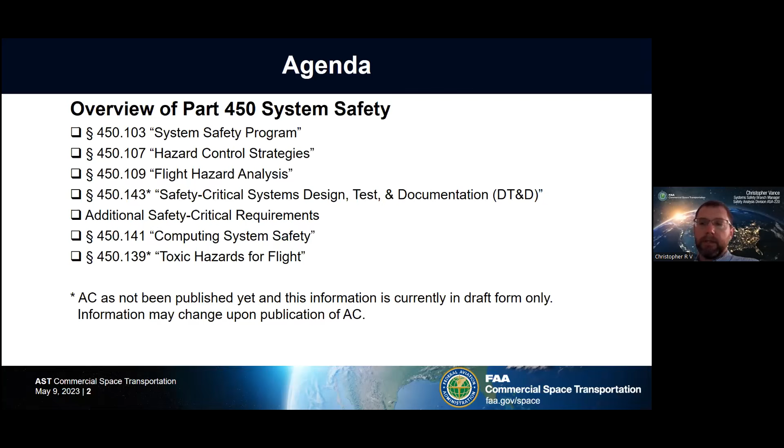So system safety at the FAA has experienced an evolution over the last 20 years. We started with a lot of our regulations in Part 415, 417, and those were system safety via prescriptive regulations. Moved into Part 431, 435, specifically for reusable launch vehicles and reentry vehicles, and Part 437 for experimental permits, which was system safety via process-based regulations.

We had a Tiger team in 2019 to assess our current practices for system safety related evaluations, and really just trying to ensure that we were completing system safety for public safety. And we rolled that into 450. 450 is system safety centric with performance-based regulations and prescribed hazard controls.

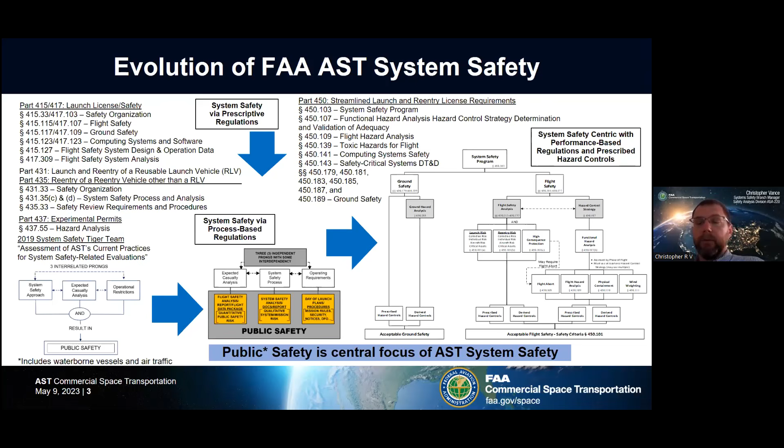And a lot of the lessons that came out of our Tiger team, we rolled into revisions to the 450 as it was being published where we could, and into the guidance that was developed. In all, though, public safety is a central focus of AST system safety, and that includes waterborne vessels and air traffic. Next slide.

All the primary advisory circulars and workshop material, if published, is going to be found on our website at the following location.

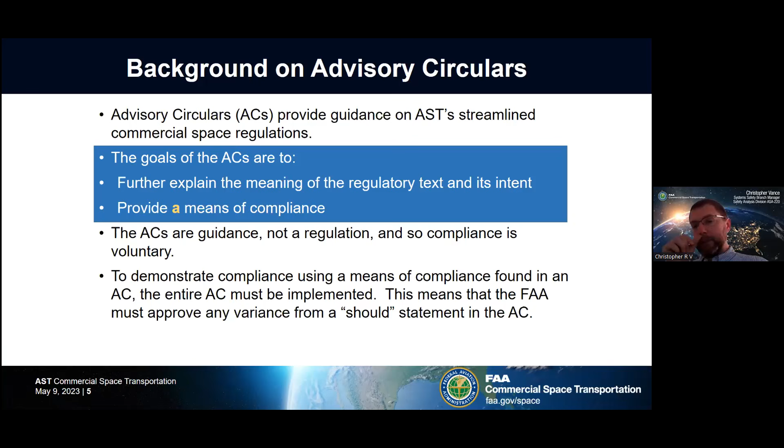A little background on ACs. ACs provide guidance on AST's streamlined commercial space regulations. The goals of the ACs are to further explain the meaning of the regulatory text and its intent and provide a means of compliance. As such, the ACs are guidance. They are not a regulation, and so compliance is voluntary. However, to demonstrate compliance using a means of compliance found in an AC, the entire AC must be implemented, and this means that the FAA must approve any variance from a should statement in the AC.

As far as all other ACs, they are found at the website and in the following locations. Comments and questions in this workshop and in all of our workshops are considered in future revisions.

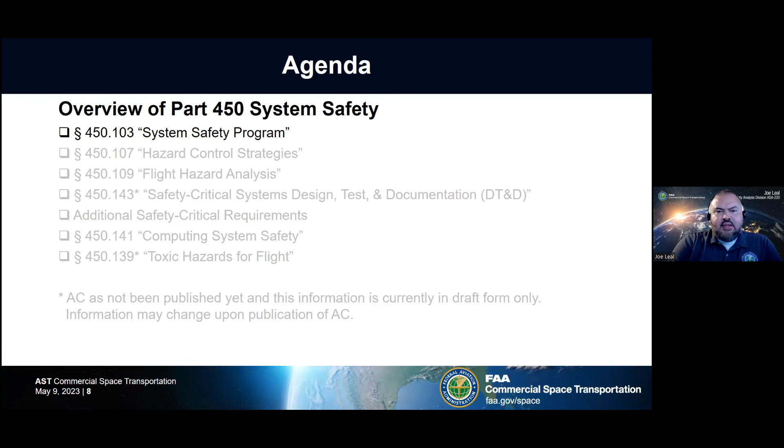But this is an iterative process. And as we launch more vehicles and look at our post-flight data, we not only refine our hazard management approach, but we learn whether our assumptions in our analysis were correct, and we iteratively update those.

So with that said, an operator must implement and document a system safety program throughout the life cycle of a launch or reentry system that includes the following: A, a safety organization; B, hazard management; C, configuration management and control; and D, post-flight data review.

An effective system safety process should be incorporated throughout the life cycle of the program, as public safety hazards associated with systems and operations of a launch or reentry vehicle are generally reliant on sound design, manufacturing, and operational processes and procedures that span the life cycle.

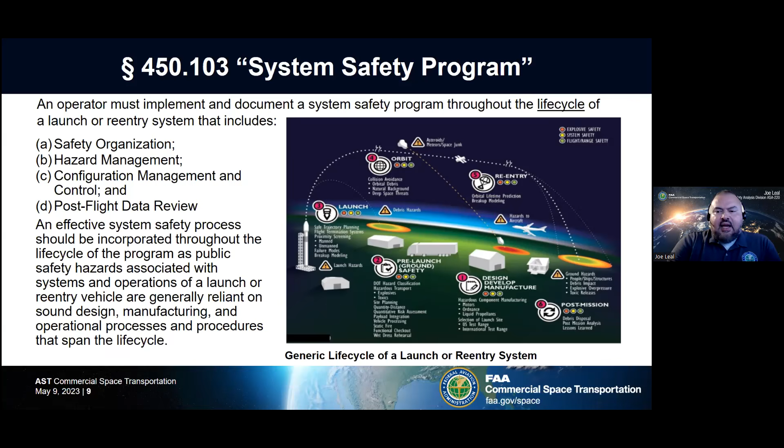So section 6.2 is called Context for a System Safety Program. And the scope of the system safety incorporates all elements of the program that contribute to achieving compliant operations. Section 450.103 specifically deals with organizational structures and management process and principles relied upon for ensuring that hazard controls and analysis correspond to actual operations.

So just a disclaimer, what you're going to find is, this AC deals with not only the organizational structure, but all of the processes that have to be in place to achieve hazard management.

The SSP documents the core processes that ensure that the fundamental risk requirements of 450.101 and the system safety risk criteria of 450.109(b)(3) and 450.185(c) are met over the life cycle of the system.

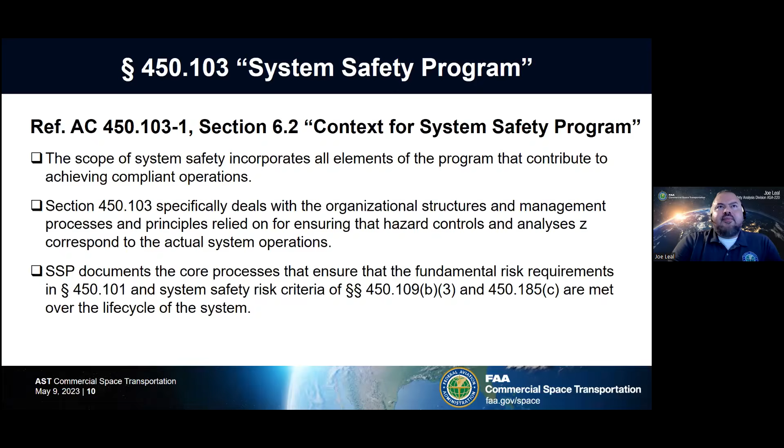As you can see, there's a couple of other outputs, which we'll talk about in a minute, but you can see that it is an iterative process. So it feeds back into the hazard management system after each mission.

So to begin with, on the left-hand side, hazard management is the assessment of the system and communication of this assessment to personnel implementing the remainder of the safety requirements. So when we talk about assessing the system, what we're doing is we're looking at our hazard control strategy and all of our analysis, and we're making sure that it actually relates to actual operations. So hazard management, you can see that assessment and communication are key.

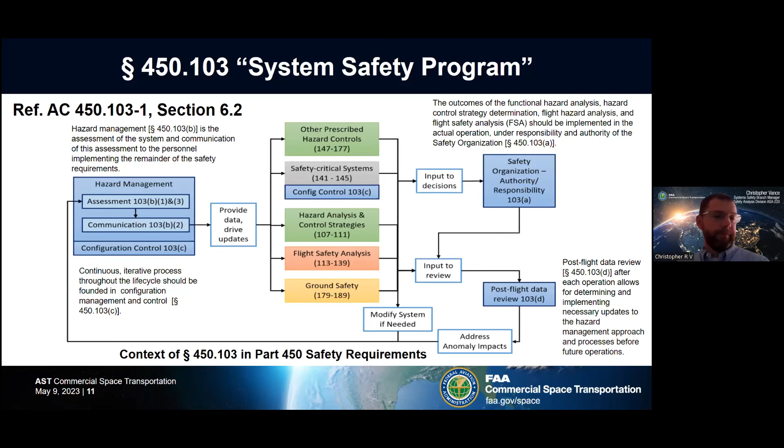Okay, so paragraph A deals with the safety organization. An operator must maintain a safety organization that has clearly defined lines of communication and approval authority for all public safety decisions. At a minimum, the safety organization must have the following positions: the mission director and the safety official. For each launch or re-entry, an operator must designate a position responsible for the safe conduct of all licensed activities and authorized to provide final approval to proceed with licensed activities. This position is referred to as the mission director in this part.

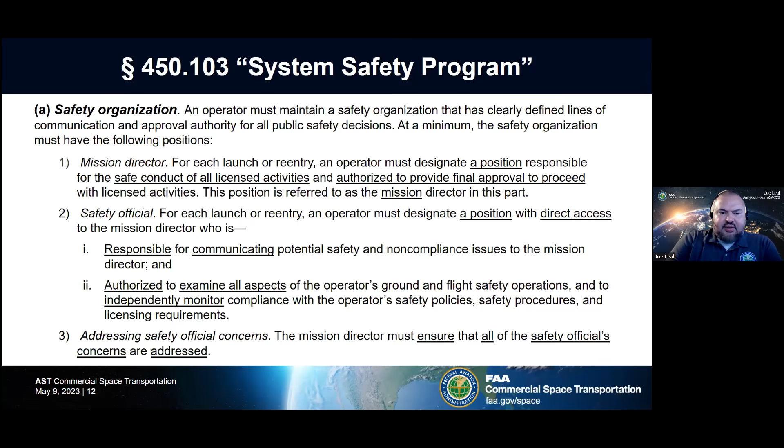Now, the safety official: for each launch or reentry, an operator must designate a position with direct access to the mission director, who is responsible for communicating potential safety and non-compliance issues to the mission director, and is authorized to examine all aspects of the operator's ground and flight safety operations, and to independently monitor compliance with the operator's safety policies, safety procedures, and licensing requirements. All of the safety official's concerns must be addressed by the mission director. So the key item there is that the mission director must ensure that all of the safety official's concerns are addressed.

So Section 7 of the AC is called Safety Organization. The establishment of a safety organization is a critical component of a launch and mission operation and public safety, whose primary responsibility is to carry out processes needed to protect public safety, as well as identified in the system safety program.

Now, 401.7 deals with mishaps, and it has 9 definitions of what constitutes a mishap, and failure of a safety organization is one of those that are covered.

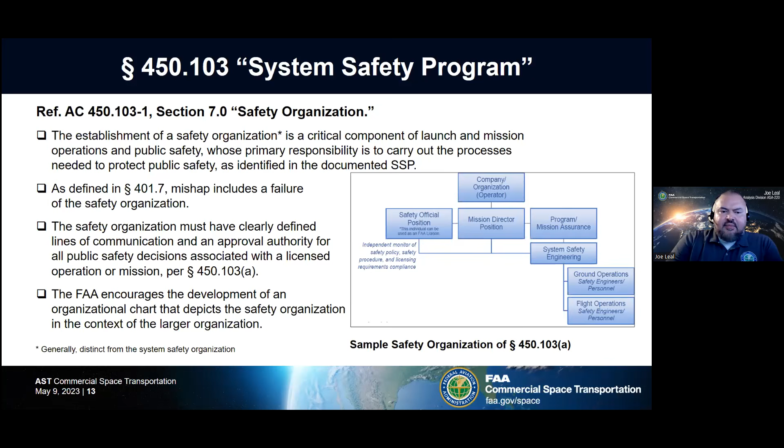The safety organization must have clearly defined lines of communication and approval authority for all public safety decisions associated with a licensed operation or mission per 450.103A. Again, we encourage the development of organizational charts like this that depict the safety organization in context of the larger organization.

So here we're going to discuss paragraph B, hazard management. For hazard management, an operator must implement methods to assess the system to ensure the validity of hazard control strategy determination, and any flight hazard or flight safety analysis throughout the life cycle of the launch or reentry system. We saw that figure earlier that was iterative, and that's really the key thing. We have a hazard control strategy, determination, and we have analysis that we need to look at to make sure that our assumptions were correct.

And that tool is called our functional hazard analysis, which we'll cover in lesson 450-107. So section 8.1.1 is called our functional hazard analysis. This must be performed for all Part 450 license applications in accordance with 450-107B. This is what provides for a methodical determination as well as continual validation of the hazard control strategy, the flight safety analysis, and the flight hazard analysis for each phase of flight during a launch or reentry operation.

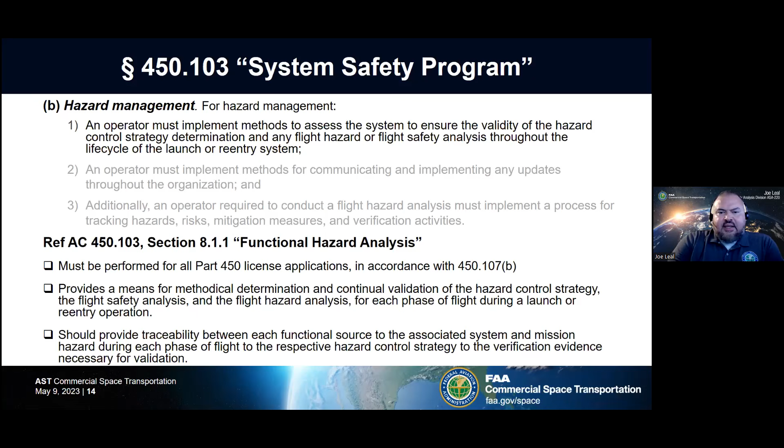So here we have section 8.1.2 called reasonably foreseeable. Anytime you see that phrase, what this means is that it's readily discernible via analysis. Just interchange reasonably foreseeable with readily discerned via analysis. So reasonably foreseeable is not associated with a probability or likelihood, but it's inherent to the methodical assessment of the entire system. As mentioned earlier, the functional hazard analysis is that tool that we use, and it's required for all 450 applications.

It's expected that reasonably foreseeable hazardous events are those identifiable through the system safety process, beyond those that could be determined solely by brainstorming. As mentioned, the functional hazard analysis is that system safety analysis tool primarily used to identify, classify, and analyze system functions and consequences of functional hazards associated with the conceptualized operation or mission.

Now, the objective is to identify all pertinent potential system, subsystem, and component functional hazards that could impact public safety. It's important to note that the identification of potential system hazards and respective functional sources should not consider any foreseeable mitigations, redundancy, or predetermined hazard control strategy. So what that's saying is that when you first look at these functions and the hazards that they may introduce, we want to make sure that when we start the process, we don't take credit for any mitigations. When we get to 107, we'll talk about that in more detail.

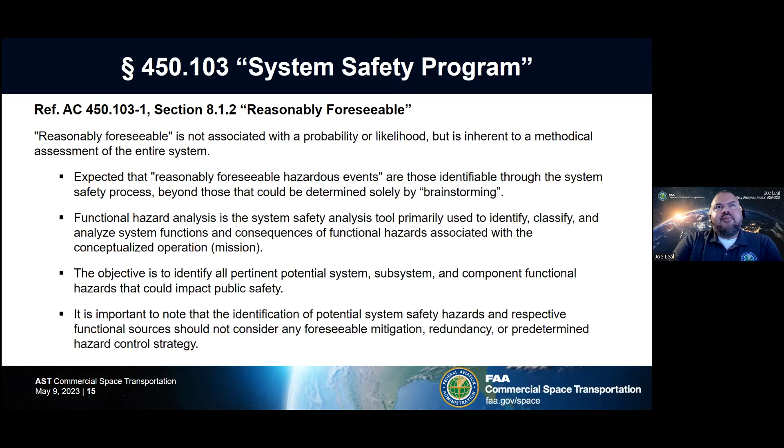So section 8.1.3, flight hazard analysis. The system safety approach of a flight hazard analysis may be determined as a hazard control strategy per 450-107A, or it could be required by 450-107 Charlie. So as mentioned, the flight hazard analysis is not only an accepted way to mitigate hazards, it's an accepted hazard control strategy, but it may also be required if none of the other hazard control strategies apply or mitigate public risk to the accepted level.

So the documented SSP should define the methodology and the process for ensuring continued validity in accordance with 450-103B1 and 450-109, and it should define a process for tracking hazards, risks, mitigation measures, and verification activities in accordance with 450-103B3. And we actually have an advisory circular for the flight hazard analysis, AC 450-109-1, which we'll cover in the lesson for the flight hazard analysis.

Now, in terms of the AC, section 8.1.4 is called flight safety analysis. So a flight safety analysis must be performed and documented in accordance with 450-113 through 450-139. Some of the items covered are things like the methodology, 450-115. There's also trajectory analysis, 117 and 119, as well as debris analysis covered in 121. So there's several sections there that cover compliance for the flight safety analysis. And the documented SSP should ensure the validity of analysis and appropriate methodology in place to achieve these requirements.

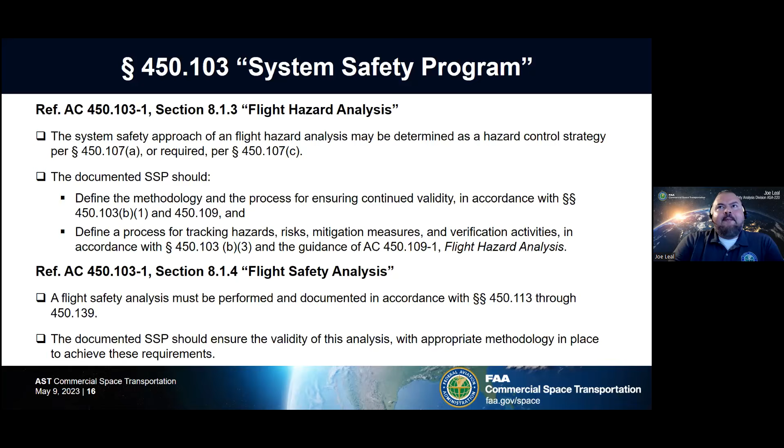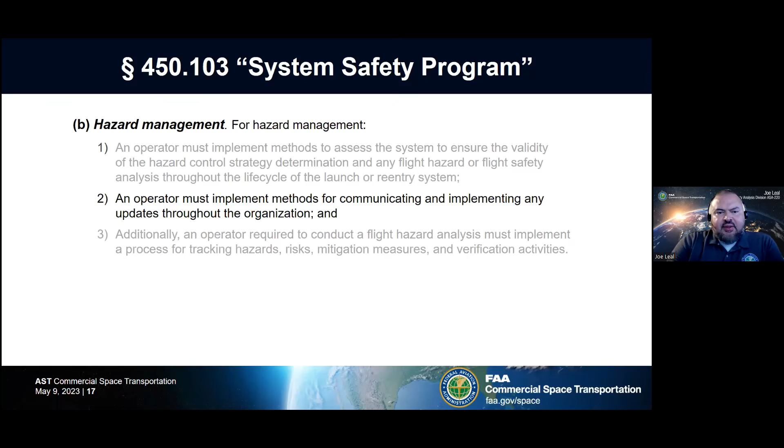So hazard management. For hazard management, an operator must implement methods for communicating and implementing any updates throughout the organization.

So section 8.2 in the AC is called managing updates. In accordance with 450-103B2, the System Safety Organization ensures communication and implementation of any updates throughout the organization. The documented SSP should define tools and processes defined by the System Safety Organization to ensure that safety analysis data is effectively communicated, required actions and necessary updates are efficiently implemented, and the safety information is thoroughly organized and maintained.

Now, for the system safety organization, the documented system safety program should at a minimum detail established lines of communication to management and engineering for informing of impacts to risk and to the public and necessary implementation actions to address impacts. So in essence, we want you to describe in enough detail all of the interfaces between the safety organization and external groups, which we'll talk about in the next few slides.

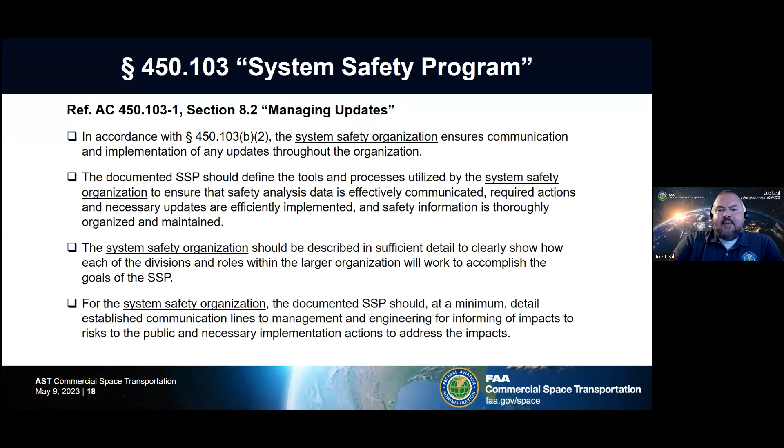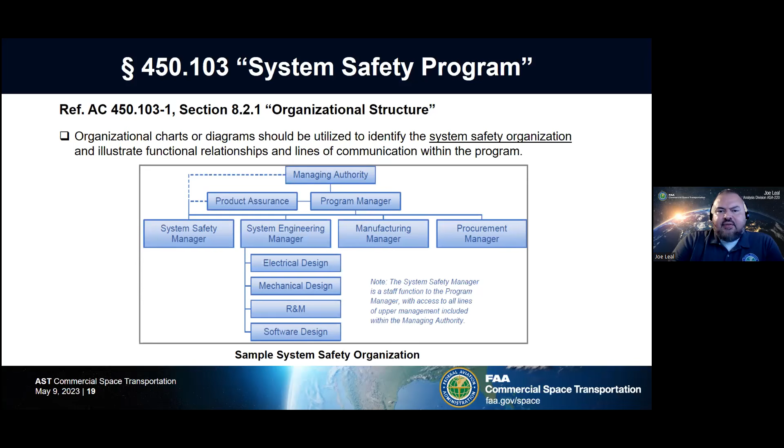So section 821 is called organizational structure, and this is just an example system safety organization. You can see that on the third tier, we have our system safety manager and different groups shown within this org chart. These types of diagrams should be used to identify the system safety organization and also illustrate functional relationships as well as lines of communication within the program. So we encourage the use of these types of charts.

So as mentioned, we have 822, which is the integration chapter. The documented system safety program should provide clarity about how the different parts of the organization interface with the system safety organization and each other.

And it should do the following: it should define the interfaces with functional organizations and other disciplines, to include things like program management, systems engineering, design engineering, and so forth. It should also define interfaces with other applicable safety disciplines, such as software safety, range safety, nuclear safety, and so forth. And then the last bullet, it should define procedures for integrating and coordinating the system safety effort, including definition of system safety requirements within design specifications and operations documents, dissemination of system safety requirements to relevant organizations and contractors, support to program and design reviews, trade studies, and so forth.

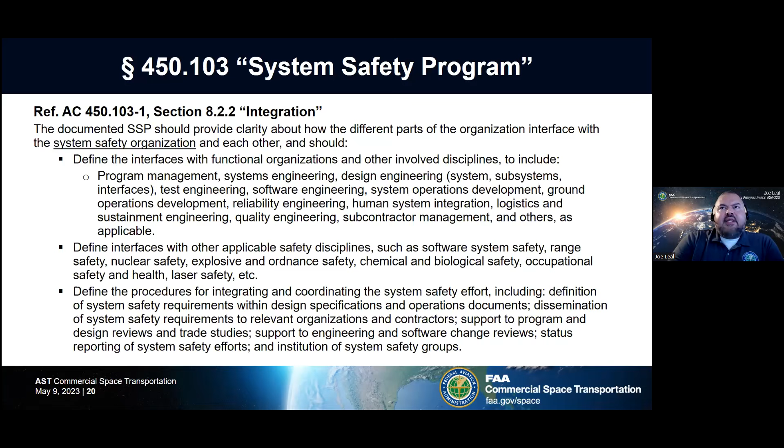Section 8.2.2, integration continued. It should also define expected criteria for interaction with configuration management processes, software development processes, data management processes, and system and design engineering processes. The interfaces and criteria should include requirements, data exchange, and communications. It should also describe tools used to convey safety information, such as a hazard tracking system or an internal workflow system, since we could have different databases and workflows to accomplish the integration and exchange of information.

Section 8.2.3 is called oversight in the AC, and an effective plan also includes oversight and tracking. The documented SSP should define the management of contractors' and subcontractors' system safety efforts that have been procured, including integration of their system safety analysis and data. It should also identify when formal approval of safety documentation is required, by whom, and how that approval is documented, and it should define processes by which management decisions are made, including timely notification of unacceptable risk, necessary actions, mishaps, anomalies, waivers to system safety requirements, and program deviations.

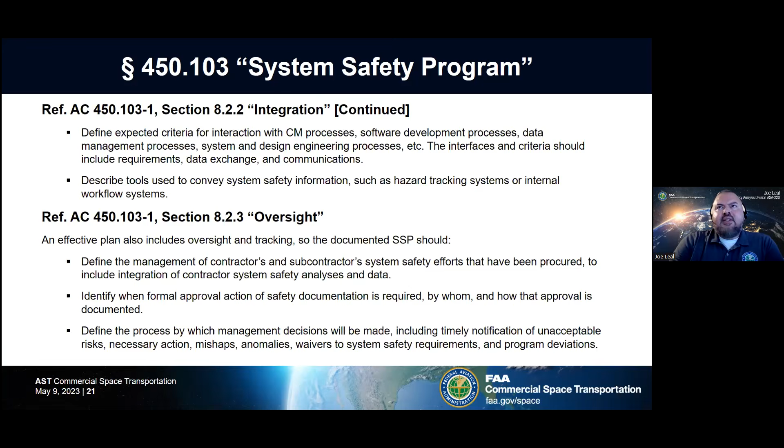Hazard management, the third item there. Additionally, an operator required to conduct a flight hazard analysis must implement a process for tracking risks, hazards, mitigation measures, and verification activities. So we talked about the criteria for when a flight hazard analysis is required, and tracking is critical.

Section 8.3 of the AC is called tracking of flight hazard analysis data. Data tracking is essential for sound and continual valid flight hazard analysis. The documented SSP should define a process and mechanism for identifying, detailing, tracking, collecting, analyzing, and retaining flight hazard analysis data. Some examples of mechanisms are hazard reports, hazard databases, and systems engineering management tools, etc.

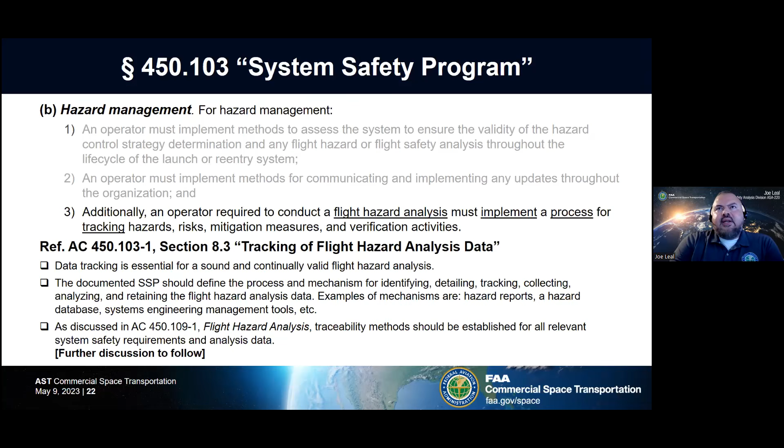As discussed in the advisory circular AC 450.109-1, flight hazard analysis, traceability methods should be established for all relevant system safety requirements and analysis data. When we get to our lesson on flight hazard analysis, we'll cover this more in detail. Next slide, please.

We talked about configuration management back in Figure 1, and it was the foundation of hazard management. Paragraph C states that for configuration management and control, an operator must employ a process that tracks configurations of all safety critical systems and documentation related to the operation. It must also ensure the use of correct and appropriate versions of systems and documentation are tracked per paragraph C1 of this section, and it should document the configurations and versions identified in paragraph C2 of this section. Next slide, please.

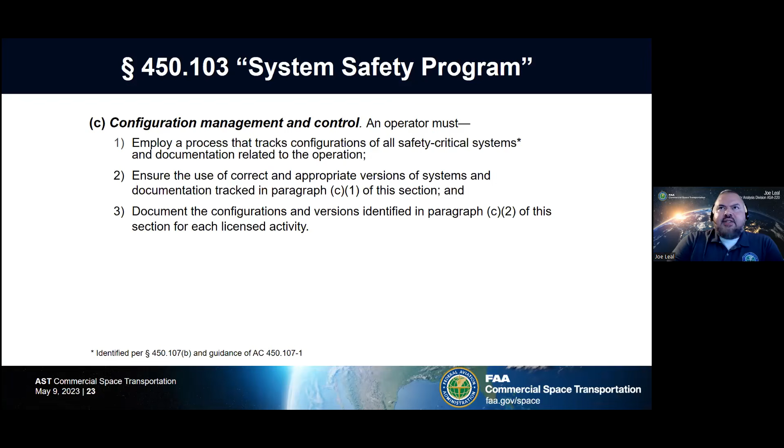Section 9, configuration management and control. The documented SSP should define the configuration management and control process specific for all safety critical systems and documentation. Standards for configuration management and control can be found in Military Handbook 61. The first version of this was released in September 1997, and the current version is version B, which came out in April 2020.

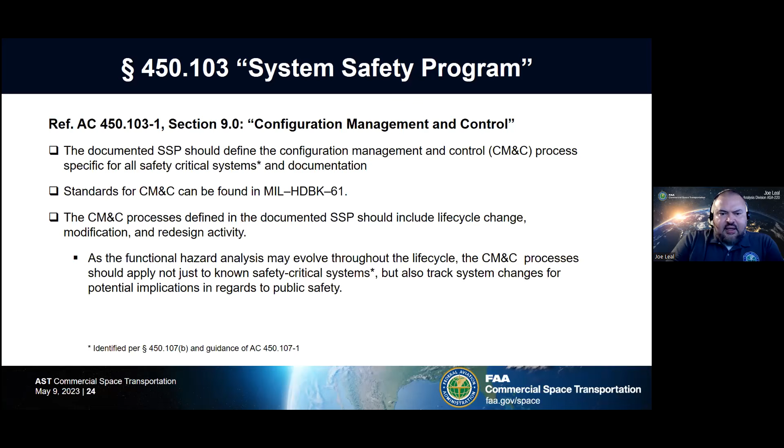You can reference this as one of the means of compliance for configuration management and control. This configuration and management control process has to be defined in the SSP, and it should include lifecycle change modifications and redesign activity. Remember that as the functional hazard analysis evolves throughout the life cycle, this process should apply not just for known safety critical systems, but also track changes for potential implications regarding public safety. Next slide, please.

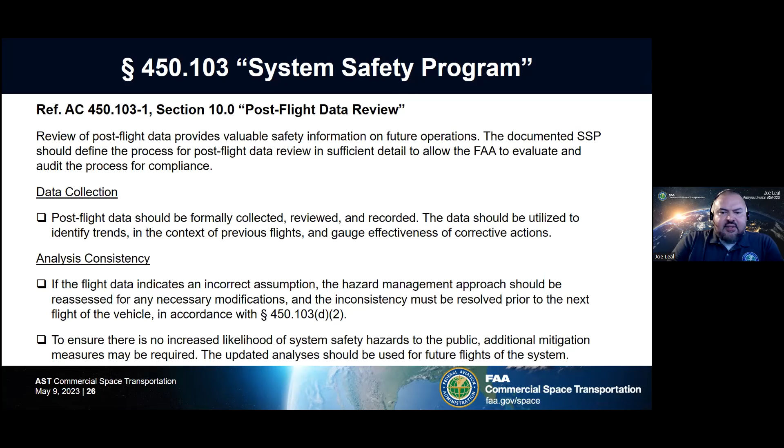As far as analysis consistency, if the flight data indicates incorrect assumptions or that the hazard management approach should be reassessed for necessary modifications, the inconsistencies must be resolved prior to the next flight of the vehicle in accordance with 450.103 D2. This is also to ensure there is no increased likelihood of system safety hazards to the public. Additional mitigation measures may be required, and the updated analysis should be used for future flights of the system. Next slide, please.

So, post-flight data review. With that, we have to identify any anomalies that may impact any flight hazard analysis, flight safety analysis, or the safety critical system, or is otherwise material to public safety, and must address any anomaly identified in paragraph D3 of this section prior to the next flight as necessary to ensure public safety, including updates to the flight hazard analysis, flight safety analysis, or the safety critical system.

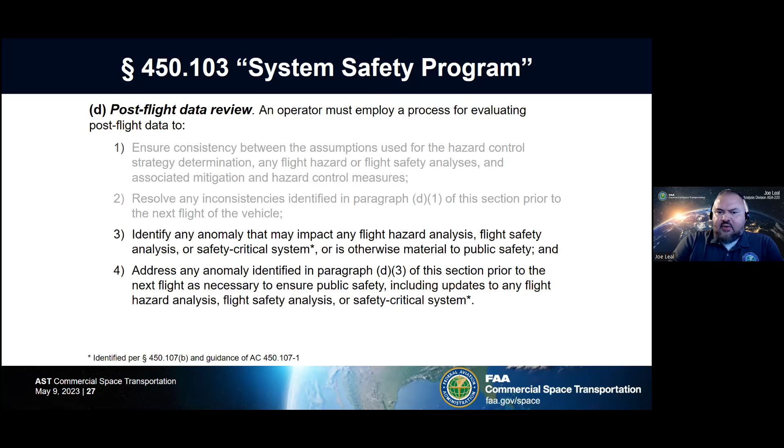There's an asterisk there, but we won't talk too much about safety critical systems in this lesson, but those are identified through the functional hazard analysis, and we'll cover that more in 450-107.

Section 10.3 is titled Anomaly Reporting and Investigation. Anomaly reporting and investigation is essential for ensuring continually valid system assessment. The documented SSP should define system safety involvement in the anomaly reporting, investigation, and resolution. The resolution process should be outlined for updating analysis and risks to address the anomaly, including any additional required mitigations, as well as for the periodic review of these analyses and the risk, and this can occur either before flight or after.

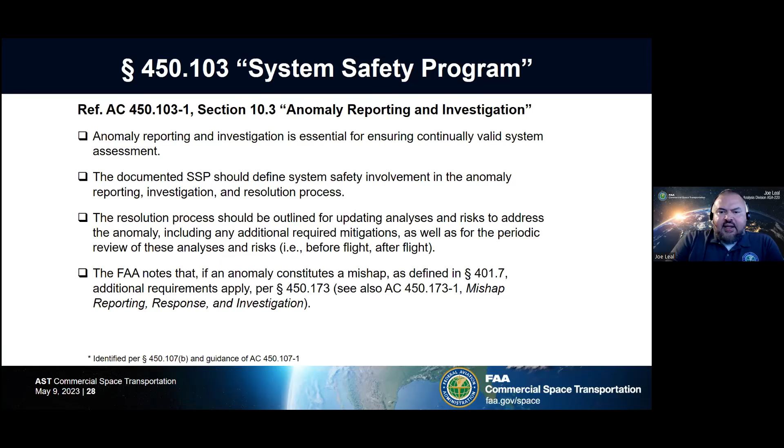The FAA notes that if an anomaly constitutes a mishap, which is defined in 401.7, additional requirements apply. 450.173 deals with mishap reporting, response and investigation, and there is an advisory circular for that.

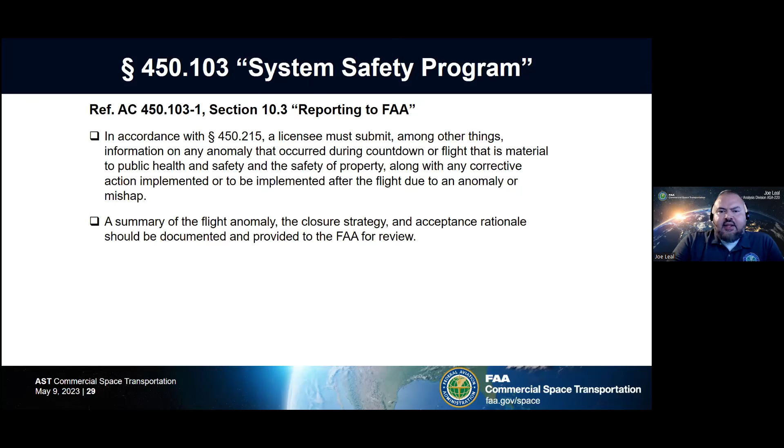Reporting to the FAA, in accordance with 450.215, a licensee must submit, among other things, information on any anomaly that occurred during the countdown or flight that is material to public health and safety and safety of property, along with corrective action implemented or to be implemented after the flight due to the anomaly or mishap. A summary of the flight anomaly, the closure strategy, and acceptance rationale should also be documented and provided to the FAA for review.

Note that submission could take form, as we mentioned earlier, either one document or a set of documents that span all of the requirements.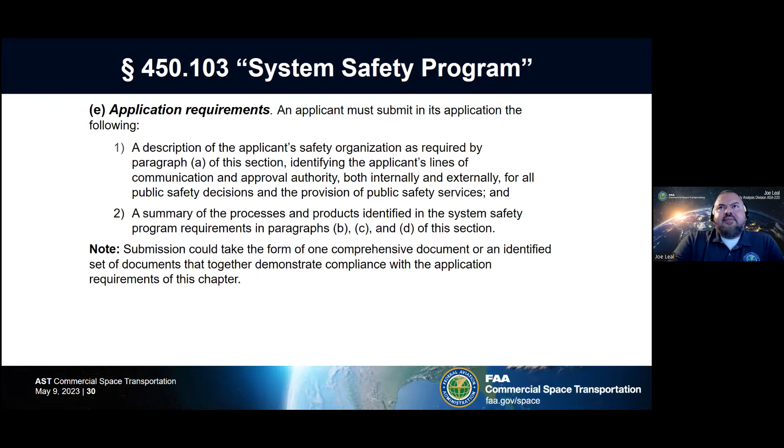Now we're going to look at the appendix. We have key aspects of a sound system safety plan. Appendix A1, system safety risk assessment. The risk assessment should be used for system safety for flight and ground safety, and it's generally qualitative, but there are instances when a quantitative demonstration may be possible or even necessary.

So for system safety for flight, it is meant to augment or add the quantitative risk calculated by the flight safety analysis and inform the development and refinement of applicable mitigations. The operator must also assess each hazard's likelihood and severity per 450.109(b)(2) and 450.185(b). So we have likelihood requirements there. We're going to look at these in the next slide.

We actually have a slide which we'll use to discuss these levels. An operator should define severity categories and likelihood levels to ensure that the system safety requirements are met. Those criteria are found again in 450-109B3 and 450-185C. These severity categories and likelihood levels may be informed by industry practice or existing government standards.

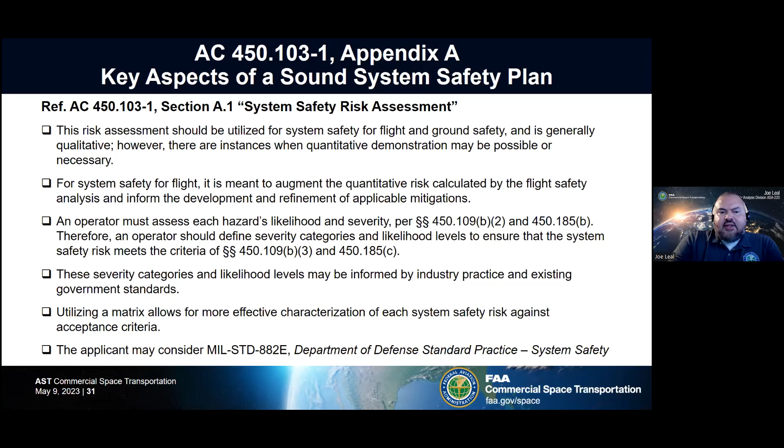So this is table 3 of the AC. What these are laying out are just two items: the severity categories on the left and the different likelihood levels that you could use on the right. We encourage you to use something that is in the MIL standard, or come up with your own severity categories that mirror what's in the advisory circular. So what you'll find is we have different categories for the severity: catastrophic, critical, marginal, or negligible.

And then for the likelihood levels during the mission, we can come up with different levels such as frequent, probable, occasional. Extremely remote, level E, is what we're interested in. So when you categorize your risk, we want to show that the likelihood is extremely remote. We'll cover this a little more when we talk about our functional hazard analysis.

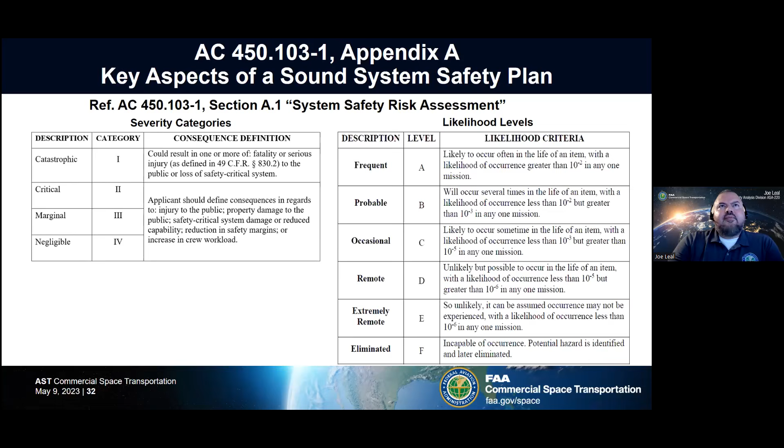Section A.2, system safety requirements. Identification and implementation of system safety requirements within system engineering processes ensure the effectiveness and validity of system assessments.

The systems engineering process should be outlined for safety design requirements, for which objectives are to mitigate system hazards through systematic application of design guidance from standards, specifications, regulations, design handbooks, safety design checklists, and other sources. Safety design requirements should be included in the system specification and expanded for inclusion in the associated lower level specifications.

Safety operational requirements should be included in procedures, tests, and inspection documentation, applicable rules or commit criteria, as well as items like operational clear areas.

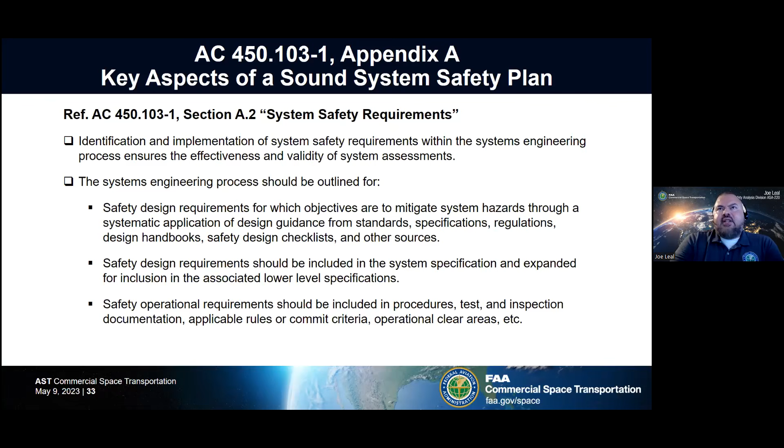Section A.3 discusses the integrated schedule. The system safety schedule ensures effectiveness of the system assessment throughout the life cycle of the program. So we want to not only track the schedule, but make sure we line up certain criteria with the schedule.

The documented system safety program should detail the system safety activities and milestones within the overall program schedule, including product or task start and completion dates, reports, reviews, and safety milestones. Typically, the milestones of the system safety program coincide with license processes, program reviews, and other contract milestones.

Thus, the schedule should detail the system engineering activities for which the system safety efforts are integrated, such as technical reviews, program reviews, design analysis, and test activities.

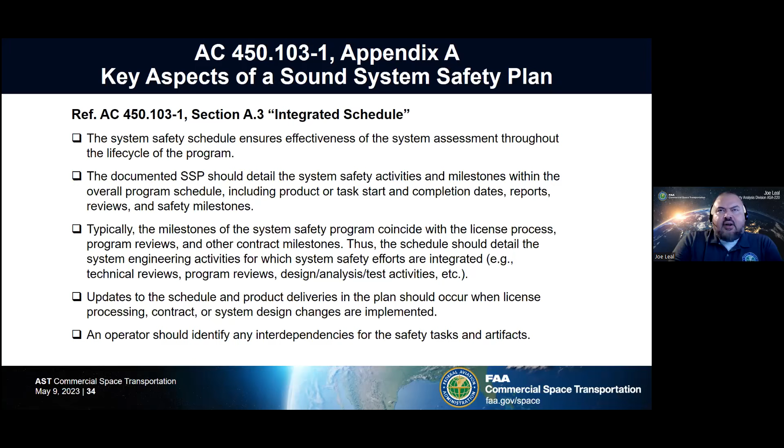Updates to the schedule and product deliveries in the plan should occur when license processing, contract, or design changes are implemented. An operator should identify any interdependencies for safety task and artifacts.

Section A31 is integration with other program activities. To be effective, the system safety activities for any program should be integrated to other program activities. To be efficient, each system safety task should be carefully scheduled to have the most positive effect.

A system safety analysis should be performed early in the design process, so it can lead to the inexpensive elimination of hazards through design changes.

As hazards are identified later in the life cycle, it becomes more expensive and difficult, not only to change the design, but also almost impractical to design out of the system. In such cases, hazards are controlled through either operations or procedures, and also training. But having to do so is going to force the operator to have long-term costs and risks associated due to identifying those hazards late in the design process.

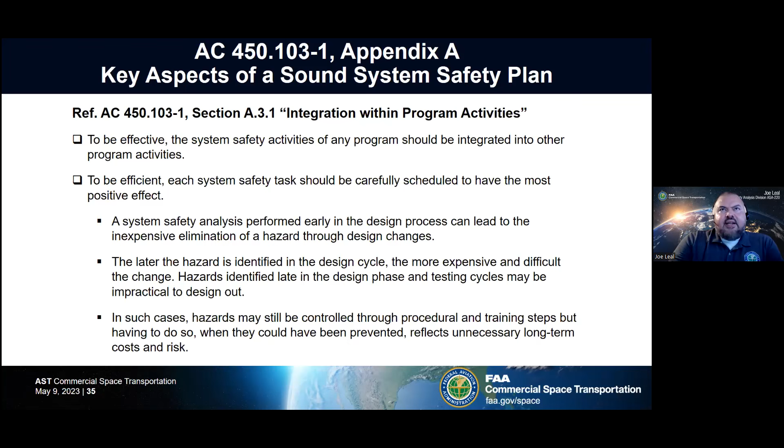Section A4, management of life cycle risk. Management of life cycle risk is essential for ensuring the continued validity of system safety analysis.

Impacts to risk include design or operational changes. These are typically managed by change impact analysis. The impact should be determined for any changes to the design configuration or operation of the safety critical system.

Safety critical systems are identified through the functional hazard analysis, which will be discussed again more in the 450-107 lesson. The current hazard management approach and hazard control strategy should be reassessed with respect to the change and updated appropriately. Impacts to risk due to reuse of systems, subsystems, or components are typically managed by a reusability approach.

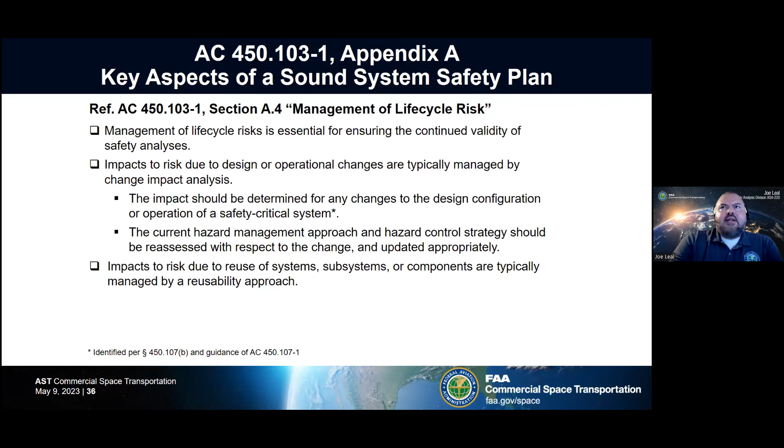Section A5, system safety data handling. Data tracking is essential for a sound and continual valid system assessment. The documented SSP should define the process for identifying, detailing, tracking, collecting, organizing, and retaining system safety data.

Examples of this data include test documentation and data, hazard reports, procedures, lessons learned, contractor deliverables, post-flight documentation, anomaly reports, and pertinent historical hazard or mishap data.

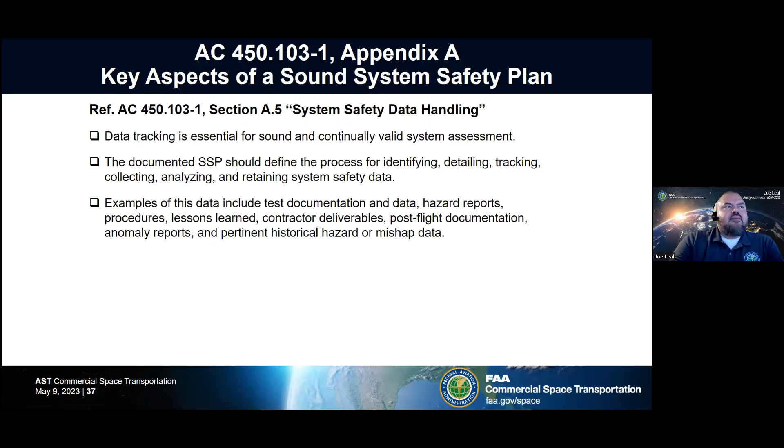Section A6, consideration of additional system safety related tasks. A complete system safety effort should consider and integrate tasks and activities usually performed by other organizations or disciplines, including associate contractors, to ensure the sound, continual, valid safety analysis.

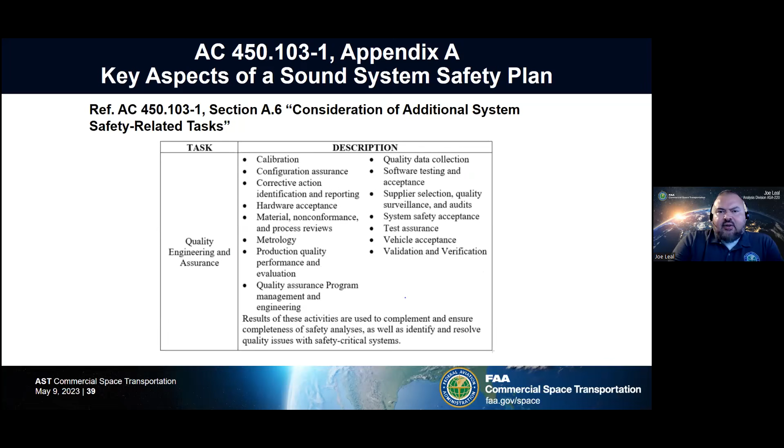450.103(a) talked about the safety organization with, at a minimum, having a mission director and a safety official. Paragraph A describes what criteria must be met by the safety organization.

450.103(b), hazard management. We want to make sure that you employ methods for assessment and validation of the determined hazard control strategies, flight safety analysis, and so forth, as well as communicating and implementing these updates throughout the organization, and a process for tracking flight hazard analysis data. So figure 2, which we looked at.

450.103(c), configuration management. This is the foundation of hazard management. We have to employ a process for tracking, maintaining, and capturing configurations, versions of safety critical systems and documents.

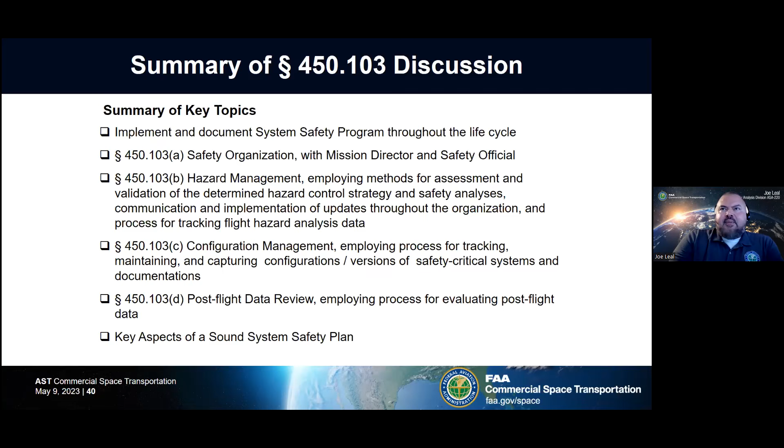450.103(d), post-flight data review. We looked at how to employ a process for evaluating post-flight data, and also aspects of a sound system safety program. As you can see, having a sound system safety program is key for hazard management.

Any questions on the lesson? Christopher, do you have any more to add? I do not. Did you see the question, Christopher? I did. So there was an incoming question about, are you able to provide examples of commercially available engineering tools to support the system safety program?

As far as tools go, generally for data and task organizing and tracking tools, Doors, Jira, some of those industry type tools are utilized. For analyses, sometimes fault tree analyses, which is a reliability tool that supports system safety analysis. Windchill, Relex tools exist. We don't mandate any particular tools, but we definitely encourage the use of available software to enhance the system safety program.